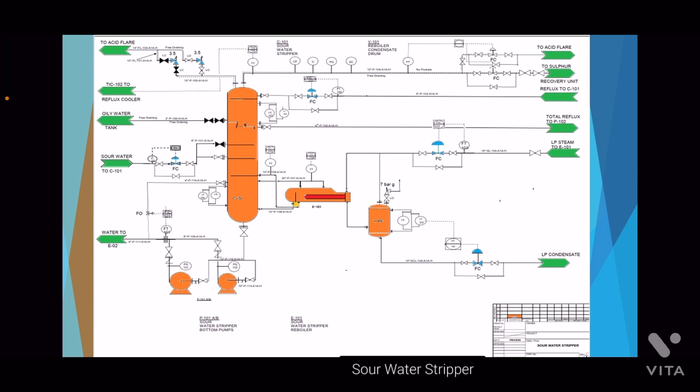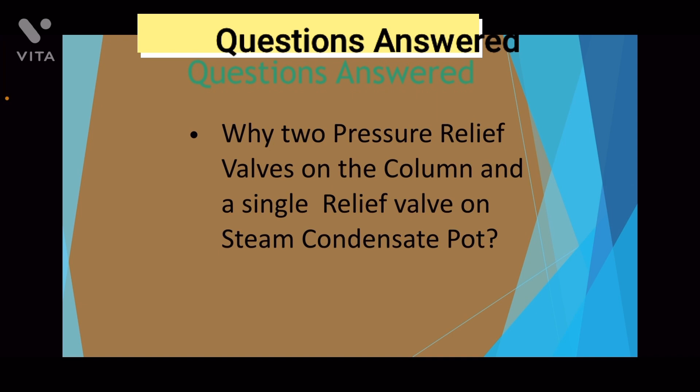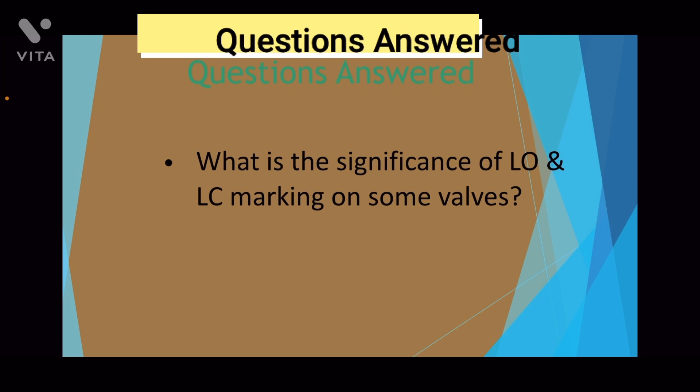As we go through this P&ID, some questions that may come up to young engineers are: why are two pressure relief valves located on the column top, whereas a single relief valve on the steam condensate pot? Why is one relief valve having a bypass around it? What is the significance of LO and LC marking on some of the relief valves? Why do notes like no pocket, free draining appear on the P&IDs?

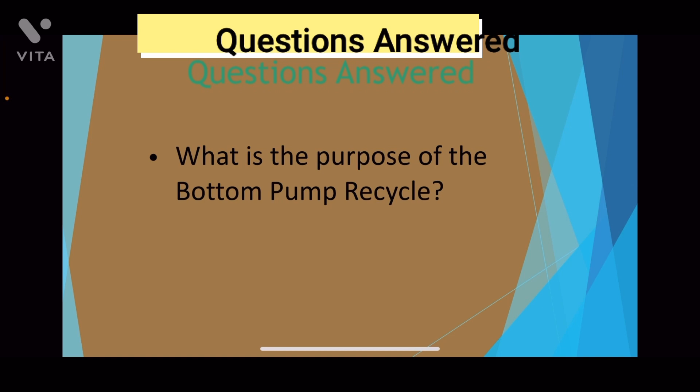Why are two pumps shown at the stripper bottoms? What is the purpose of the bottoms pump recycle? Why are no isolation valves shown on the reboiler inlet and outlet going back into the stripper?

The path to answer these questions lies in understanding the principles behind P&ID development. Once you know these principles, you can confidently interpret, answer, and develop P&IDs, and you will be capable of providing justification to the P&IDs that you develop. Using the sour water system P&ID, this video will take you through those very principles that form the backbone of every P&ID.

Let's first start with the PFD of the sour water stripper. This stripper operates at 0.5 bar gauge. The heated sour water enters the tray at around the middle of the column at about 80 degrees Celsius. A reflux stream at 90 degrees is drawn out at one tray above the feed tray. The reflux is pumped through a cooler and fed to the top of the stripper at 60 degrees Celsius.

An intermittent stream of oil can be removed whenever there is a buildup of oil in the internal reflux stream. The stripped gas leaves through the top outlet of the stripper at 60 degrees Celsius. The column bottoms at 120 degrees Celsius are pumped away after exchanging heat with the feed stream.

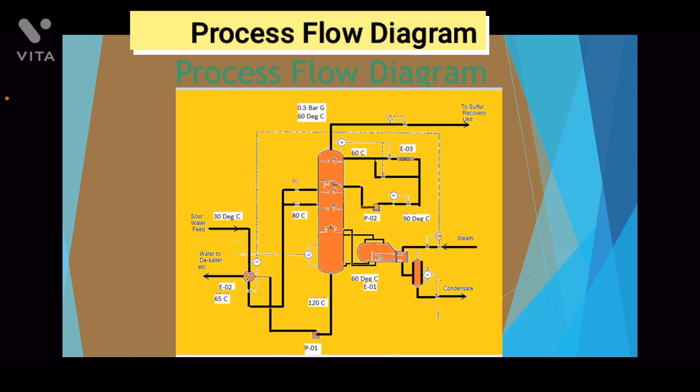A reboiler is provided at the base of the column to generate vapor that will enable the stripping action. Steam is the heating medium supplied to the reboiler tubes, and after exchanging heat with the stripper bottoms water, the steam condensate is taken away from the reboiler tube.

Ensuring safety is the first principle utilized in P&ID development. Why? Because most chemical plants handle hazardous fluid at high temperature and pressure. The key requirement of any hazardous chemical facility is that it should be safe to operate and should not cause any harm to people, the environment, or the facility itself by way of fire, explosion, or release of toxic chemicals. Of course, incorporating safety features is ensured throughout the design process.

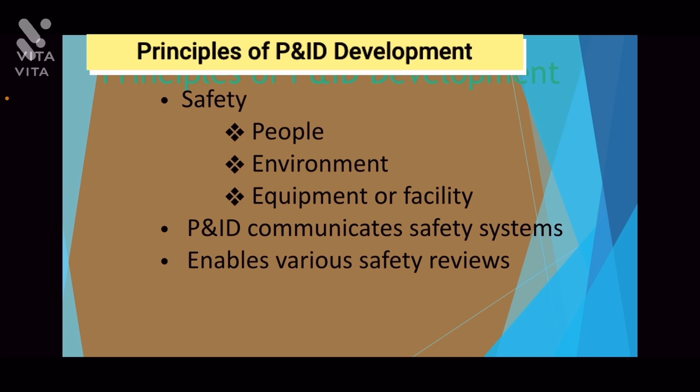The P&ID presents the opportunity to coordinate and ensure uniform safety requirements across various documents developed by different departments during the engineering. It conveys the key safety requirements to all users. Now, let us quickly go through the sour water stripper P&ID to glance at the safety features that are incorporated.

Pressure relief valve: at the top of the column, we see that there is a safety valve set at 3.5 bar gauge. This means the safety valve will pop up at 3.5 bar gauge and ensure that the column never exceeds 3.5 bar gauge. It means the column is designed for a design pressure of 3.5 bar.

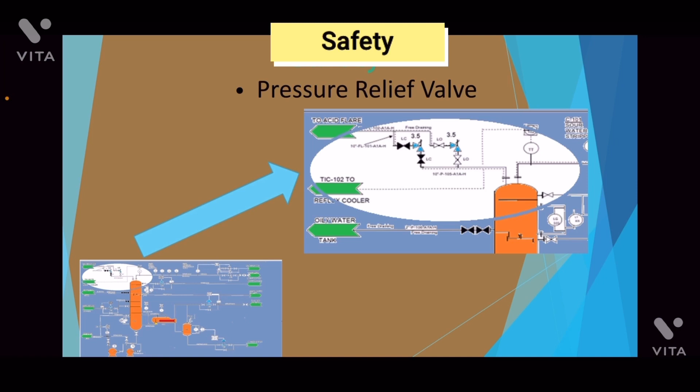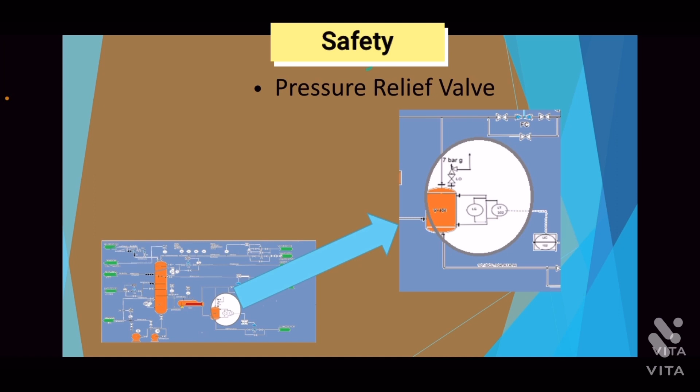Another pressure relief valve is located on the condensate pot and this is set at 7 bar gauge. It ensures that the condensate pot never exceeds the design pressure of 7 bar. It also means that the LP steam design pressure is 7 bar.

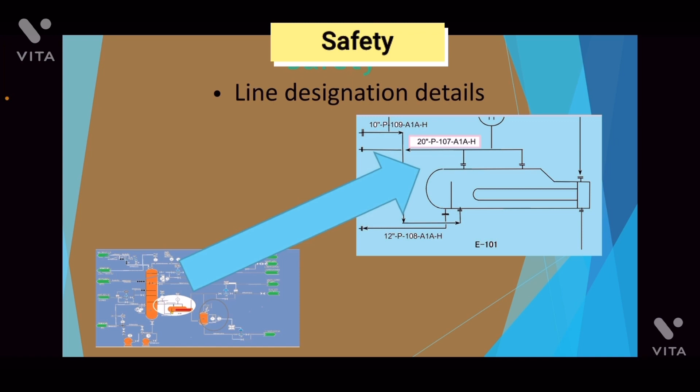The third safety feature on the P&ID is the line designation details. Sample line designation is 20-inch P107A1A-H. 107 is the line number. P indicates the service of the process. 20-inch is the size of the line. Now let's look at what is A1A. A1A is the pipe specification, which conveys the rating of the pipe, the thickness of the pipe, and the metallurgy of the pipe. Next is the indication H, which indicates the insulation requirements on the pipeline.

Next is the alarms and the notes. You find that there are alarms on the temperature indication on top of the column: high, high and low, low. The low low temperature alarm is there to ensure the operator can take action if the temperature goes below a certain level.

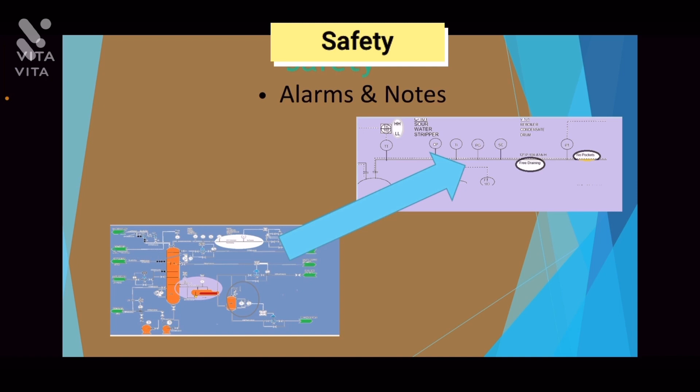At a certain temperature, the condensate condenses on top of the column and can cause corrosion on the line. That's why the top of the line is steam traced. You see notes like free draining and no pockets on the pipeline. This conveys to the piping engineer that this line has to be free draining into the destination, and there should be no pockets on the column overhead line, so that no condensate is collected which may become corrosive in nature.

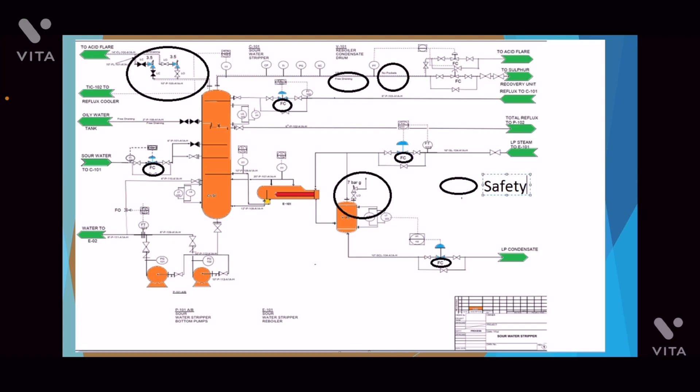Here is the sour water P&ID, and circled are the locations where safety features are incorporated. Another feature is the air-fail condition of the control valves, which enables them to go to a fail-safe position on instrument air failure.

Next, let's look at the layers of safety. Safety in an operating plant can be expressed in layers, shown in the picture here. These layers are indicated in the P&ID. Each higher layer can be activated if the lower level layer fails, creating a system with subsequent levels of safety to help prevent catastrophe from occurring. The goal of safety is not to reach the top of the triangle, but to stay as close to the bottom as possible. This shows the importance of inherently safe design process.

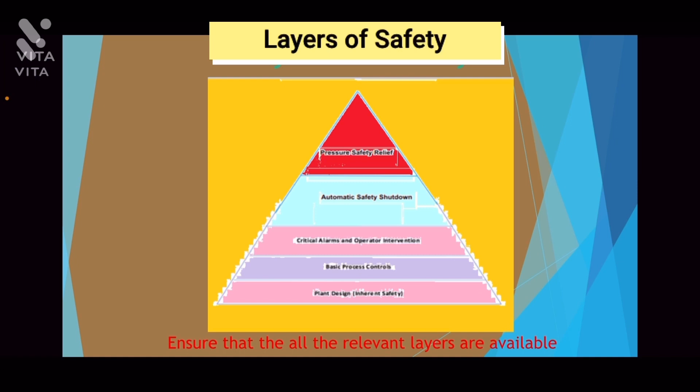Regulations provide a baseline for engineers to operate when designing a chemical plant. They have brought safety to the forefront of design. Although you can never eliminate these upper layers of process safety, by designing a process robustly, major process safety incidents can be avoided. The second feature that is very critical to the development of P&ID is operability.

Operability is the ability to keep a piece of equipment or system in a safe and reliable functioning condition according to predefined operational requirements. It can be broken down into flexibility, accessibility, ability to monitor and control, and ensuring efficient operations. It is also important to develop safe operating limits for various equipment, or the envelope in which it will operate safely and reliably.

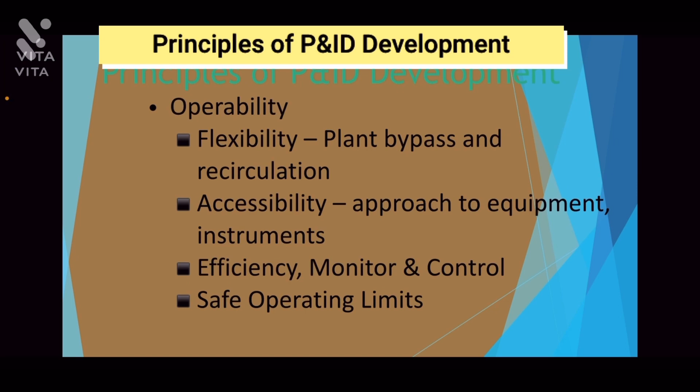Operational flexibility can be related to startup, shutdown, and other plant bypass and recirculation features that are provided to enable operators to continue operations in a safe and reliable manner. This aspect will be separately presented to you.

Now let's look at the flexibility features shown on the sour water stripper P&ID. You see that the control valves are given block valves at both sides, and a bypass is provided around the control valve. This is a flexibility for the plant to remain operating even when there is a problem with the control valve.

When a control valve gets into a problem, the operator can open up the bypass and ensure the flow keeps going, and they can shut down the control valve by closing the inlet and outlet valves and take it for maintenance.

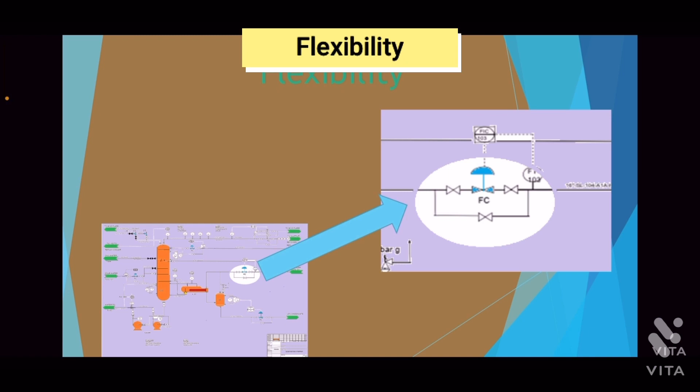Another flexibility feature that we saw was the spare safety valve. There is an LO and LC marking on these valves. The LO is a lock open valve, so the valve that is locked open has the safety valve online, and the valve that is LC marked, or lock closed, shows that's a spare safety valve present online. So the operator can change over quickly while the plant remains running.

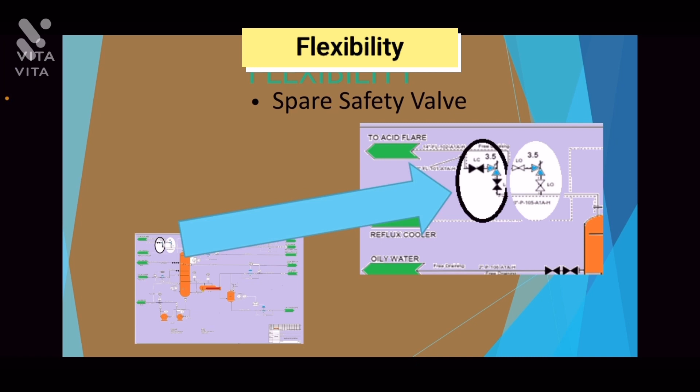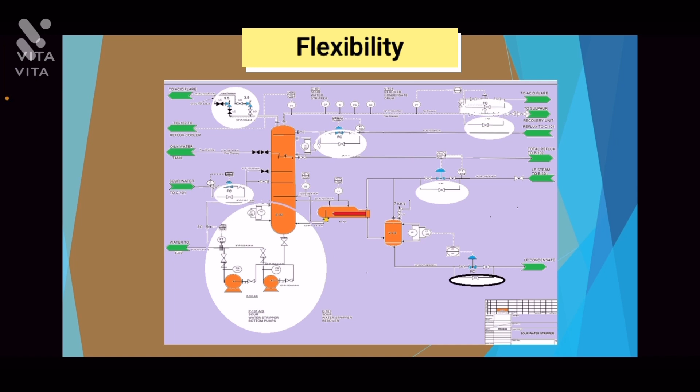So summarizing, this is the sour water P&ID, and highlighted here are all those sparing and flexibility requirements that we discussed just now. Let's now look at the accessibility features.

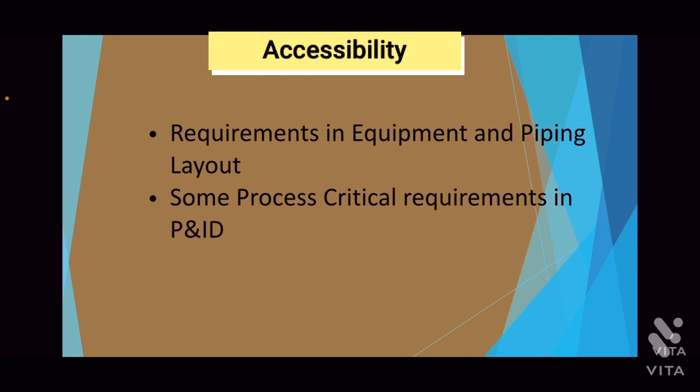Accessibility features are better shown on piping layouts, but in P&ID some process critical requirements are shown. For instance, on the sour water P&ID, a note is shown on the side stream takeoff valve stating that the level gauge should be seeable from this operable valve, so that the operator can watch the level gauge and manually open the valve to drain off the oil and close it whenever the level goes down.

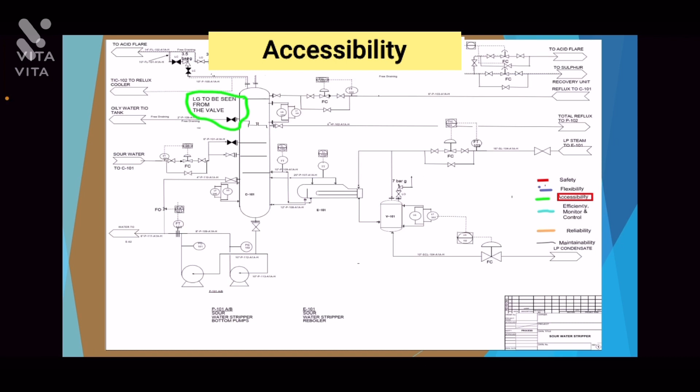These kind of features which are critical to process are noted on the P&ID, whereas there are many more accessibility features for maintenance and operations that are not really written down on the P&ID. Further, let us look at the monitoring and control aspects.

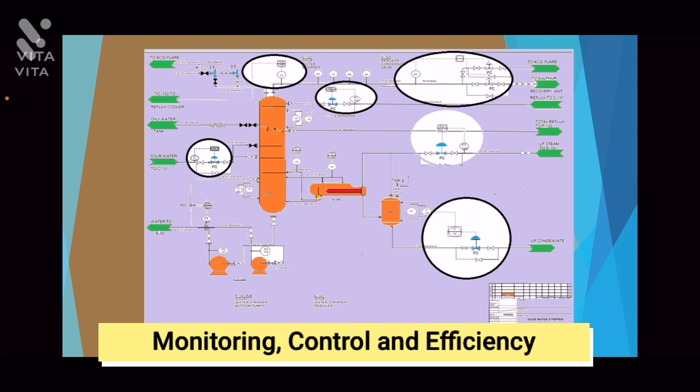Here on this sour water P&ID, we have several control schemes like feed flow control, top pressure control, the reflux control, the top overhead temperature control, which controls the temperature of the reflux stream coming into the sour water, and also the steam flow and the bottom condensate level control, existing to enable safe operation of the column.

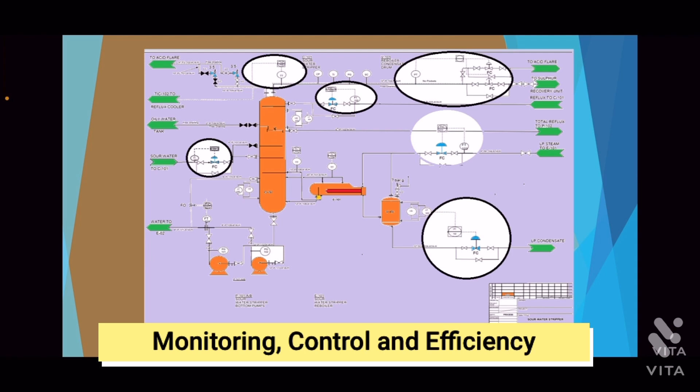Now let's go into the reliability features that are available on this P&ID. We have the pump minimum flow concept shown on the P&ID, the pump casing vents, and the pump also has a low level alarm on the column bottom, which enables the pump to remain operating and never starve for water.

And the corrosion probe that we discussed previously is a reliability feature on top of the column line to prevent or to identify corrosion issues early and take action.

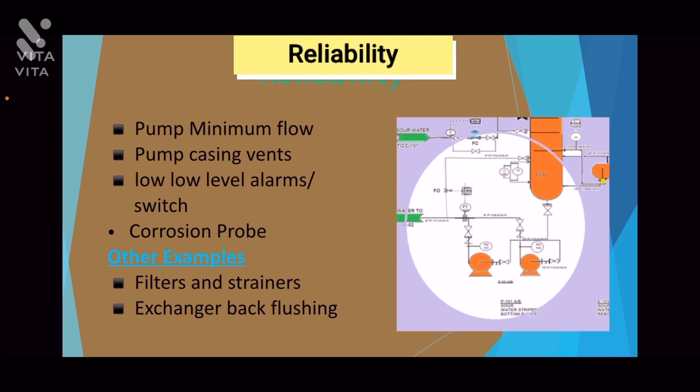There are other examples such as filters and strainers provided on streams which have solid particles that can cause problems downstream. Exchanger back flushing schemes are shown on the P&ID, which enable online flushing to remove particles that build up on the tube side of the exchangers.

So this is the sour water P&ID, and shown here are all the reliability features that are discussed right now. It gives an overview of various facets that are shown on the P&ID that enable reliability.

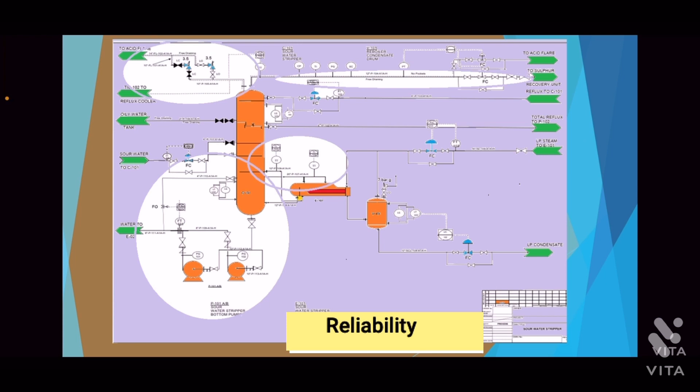For instance, we didn't discuss this point. On the reboiler inlet and the outlet, we have temperature measurements in the DCS to ensure that the temperature never increases too much, which can cause fouling in the reboiler.

Now let's look at another feature or principle that is very critical for the P&ID development, that is maintainability. Maintainability is the ability to isolate, flush, and purge the equipment before it can be given to maintenance, and to remove the hazardous and flammable materials from the system.

Vendor manuals generally provide information for the requirements of maintainability to be provided, or companies have some kind of a standardized approach which are already given in standards, and the engineers can utilize them to show the minimum maintenance requirement. Further, reviews such as design reviews and hazard reviews are good opportunities for the operations and other safety people to review these requirements.

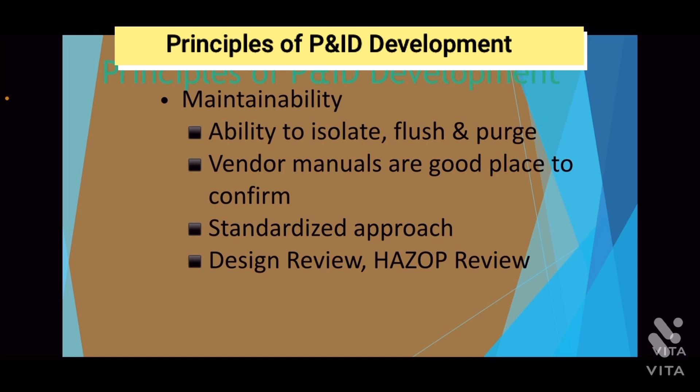Now let's have a look at the stakeholders for the P&ID. There are 4 key players who have a stake in the P&ID development, and in fact in the whole process plant design, construction, and operation. They are the regulators, owners, operator, and the designers.

The severity of process safety incidents can be very high. You might have heard or read about the Bhopal incident in the 1980s. The regulators or the government have come up with regulations based on internationally accepted rules to make the owners comply with the EHS, or Environment, Health and Safety rules, and ensure safety of people, environment and the facility. All have to comply with the law of the land.

Now let's look at each of these stakeholders. What are their pulls and pushes? The owner is mainly concerned about cost and payback. He doesn't want any gold plating of the plant. The owner sets the priorities for safety, cost, and schedule. Some projects are schedule driven, some are safety driven, and some are more focused on cost.

The operator, on the other hand, is more focused on the flexibilities required to start up, shut down, operate, and maintain the plant. The operator requires reliable, flexible, and safe operation. Simplicity of operation and trainability of methods may also be a concern for the operator.

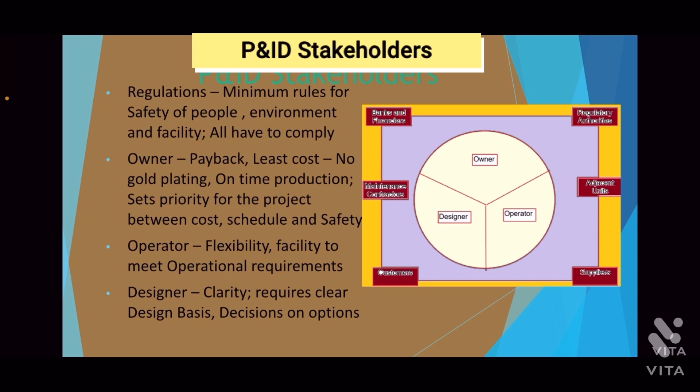And of course, we have the banks, financiers, maintenance contractors, and customers who have a stake in the safe and operable plant, but their influence on the P&ID development may be minimum or nothing. But they will have an impact directly or indirectly if the P&IDs are not accurately reflecting the equipment details.

Let's have a look at the hierarchy of rules that are used for the development of the P&ID and other engineering documents, because there are a number of rules that play out, such as local regulatory codes, owner company guidelines, design company guidelines, and industry practices and codes such as API and ASME. The designer has these rules to comply with.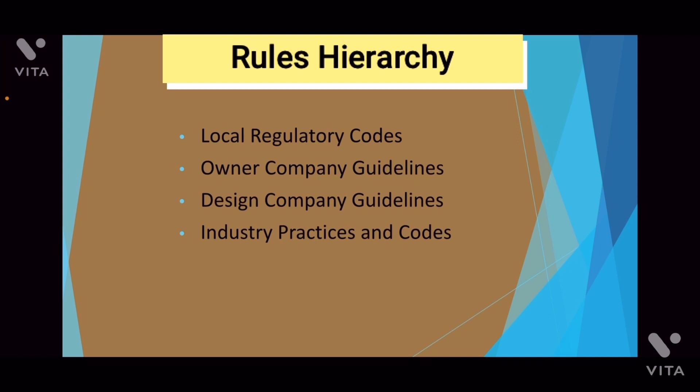Clarity is often provided in the project guidelines. When the requirements of these codes and standards contradict each other, the hierarchy of rules requires that the engineer comply first with local regulations, next with company standards, thirdly contractor standards, and finally industry standards will be applied. There are 5 parameters used in plant operation monitoring.

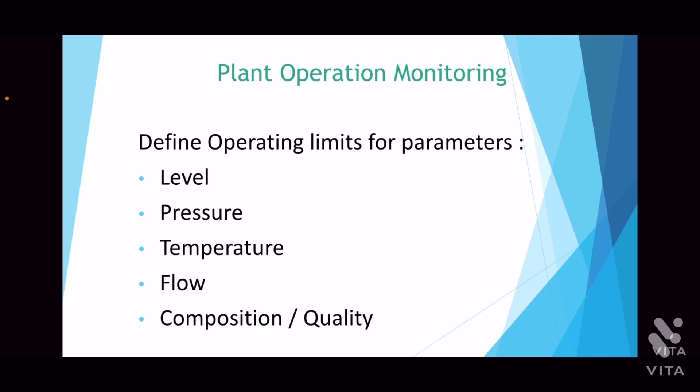They are level, pressure, temperature, flow, and composition. One of the most important guidance documents for plant monitoring is the Safe Operating Limits document. This document is developed by the design team and reviewed with operations. The operating limit for each parameter is identified to be safe, taking into account process safety, environment impact, reliability, and other reasons to ensure effective and efficient operations.

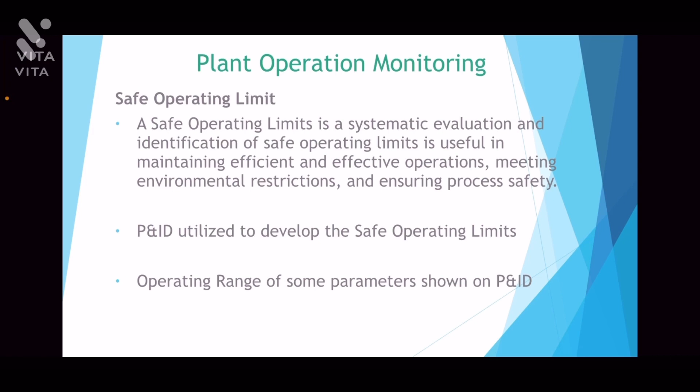Normally, certain clients require the P&IDs to show the operating range of some parameters. Operations would have a tendency for maximum flexibility when deciding the operating range of a parameter. See how: if the operating temperature of a particular equipment is 120 degrees Celsius, say, and the design temperature is 200 degrees Celsius, that design temperature is normally the same as the MAWP, or maximum allowable working pressure.

Normally, the left-hand side bar is preferred by operations, where the green is the operating range and the yellow highlighted range is the safe design range. So operations have the maximum flexibility to operate as close as possible to the design temperature itself.

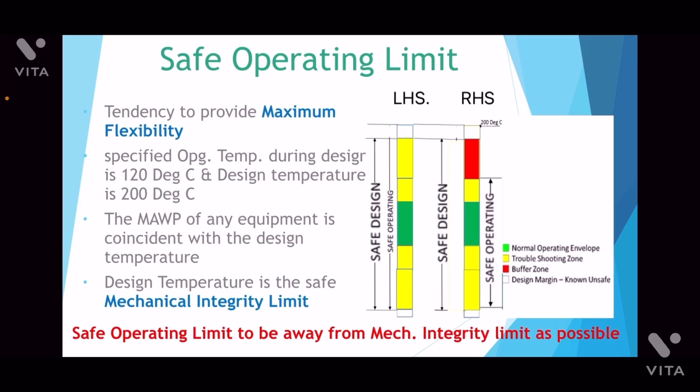However, the right-hand side is the one recommended, with a red zone implemented as a buffer zone. At the transition between the yellow zone and the red zone, a temperature alarm is provided, and at the end of the buffer zone, if required, a safety interlock function can shut down the unit before the temperature hits 200 degrees Celsius, the design temperature.

So a methodology for safe operating limits may be looked at here. The idea for the team is to obtain the historically acceptable operating envelope, taking into account all modes of operation such as startup, normal operation, shutdown, or any other mode of operation.

Then the key limit values of the process parameter are identified based on design limits, mechanical integrity limits, and sometimes limitations of instruments located on the equipment. We need to identify the equipment and instrument dependencies, and based on that the limit values are identified.

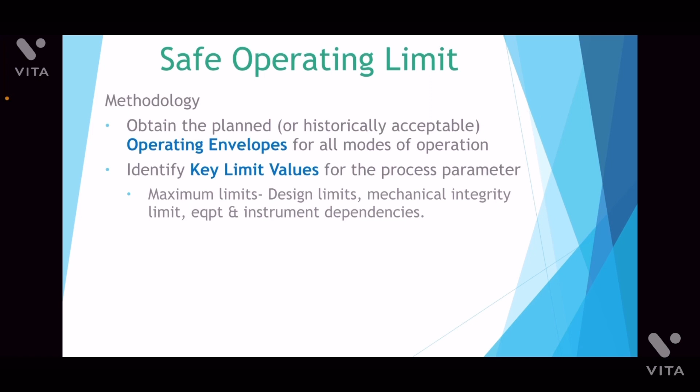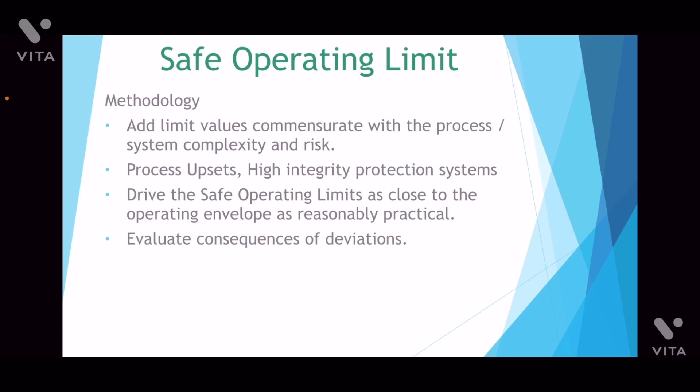Having identified the limit values, depending on system complexity and risk involved, the limit values for the particular parameter are decided based on process upsets and high integrity protection systems. The main aim of this exercise is to drive the safe operating limits as close to the operating envelope as reasonably practical. Once this is done, the team evaluates the consequences of deviations from the operating range.